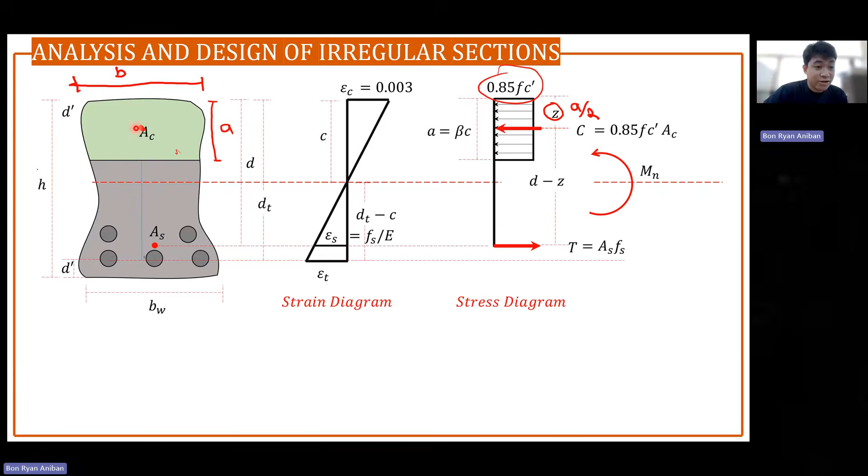Let's try to solve this problem. Problem number 1: same principle will be applied for the analysis. The triangular beam shown in the figure is subjected to a flexural moment that results in compression at the top of the beam. The concrete compressive strength is 35 megapascal and the yield strength is 420 megapascal.

Check if the section is adequate to support the maximum positive bending moment. We already have the given dimensions of the beam. We're just going to identify if this positive section works, since our reinforcement should always be on the tension side. Since our tension reinforcement is at the bottom, this is for the positive section of the bending moment.

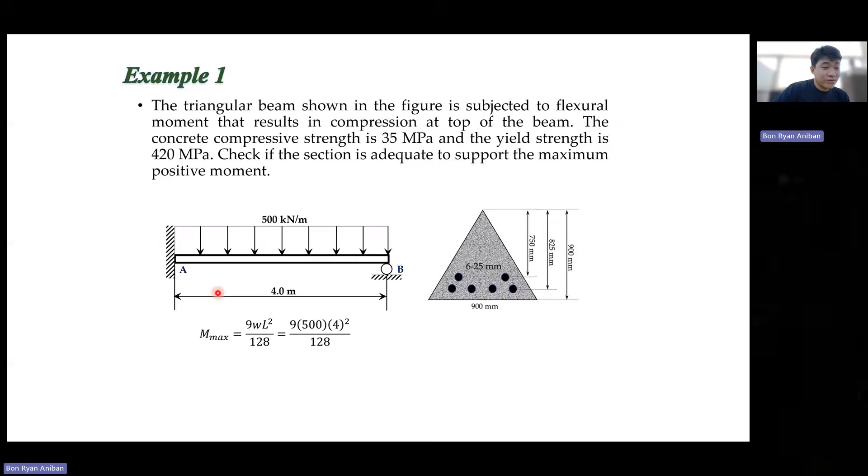So we have to identify the maximum positive moment of this propped beam, fixed and roller support. From theory of structures, you can derive the formula for the maximum positive bending moment of a propped beam with a uniform load. Here is the derived formula. The maximum bending moment is not at midspan, not exactly at the center. That is 9WL squared over 128.

That's the positive moment. The negative moment has a different value. We just need to confirm if this section can adequately resist this loading: 9WL squared over 128. So the maximum positive bending moment of this propped beam is 562.5.

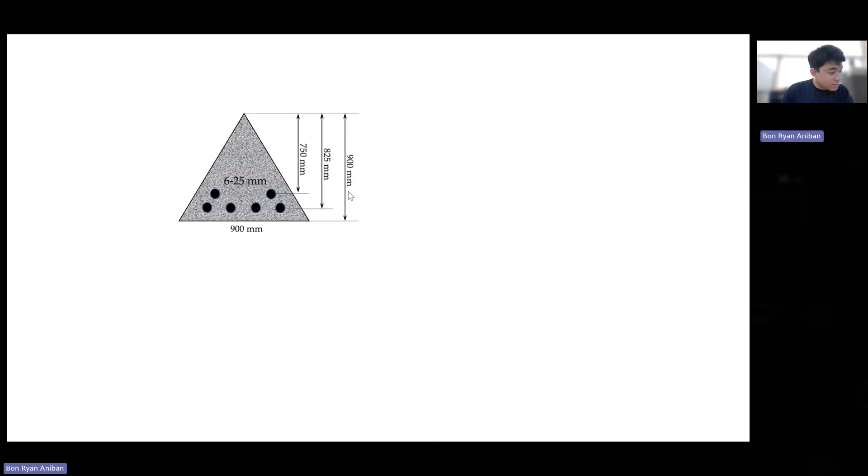Now let's analyze this section. We start the analysis with FC prime equal to 35 and 420 megapascal. Let's draw the stress strain diagram.

In this figure, the DT is already given - we have 825 for DT. The D1 was given in class for us to identify the effective depth, since the effective depth wasn't directly given to us. So we have D1 here, and we'll solve for the effective depth using Varignon's theorem.

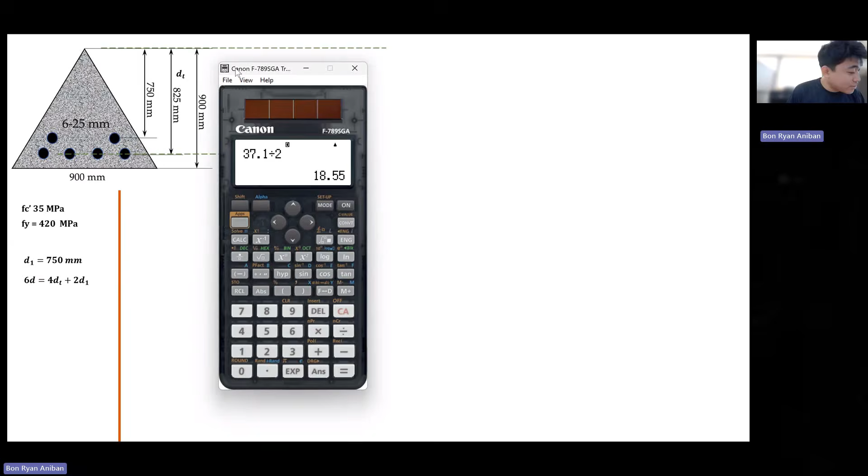Still measuring from the top distance, we apply Varignon's theorem. We have 2 bars times D1 plus 4 bars times DT, which is 825, equal to 6 times the effective depth - 6 being the total number of bars. So what will be the effective depth if we have 2 layers of reinforcement? Again, we just apply Varignon's theorem, identifying the centroid of these rebars measured to the top.

We measure from the very vertex, because we always measure the stress strain diagram from the top of the compression zone to the extreme layer of tension reinforcement. So let's solve for the effective depth: we have 2 bars at a distance of 750 plus 4 bars at a distance of 825, with the dimensions already given, and the total number of bars is 6. So the effective depth is 800 millimeters.

So let's continue drawing the stress strain diagram.

So we already have the effective depth, which is 800. And then we also need later the value of beta.

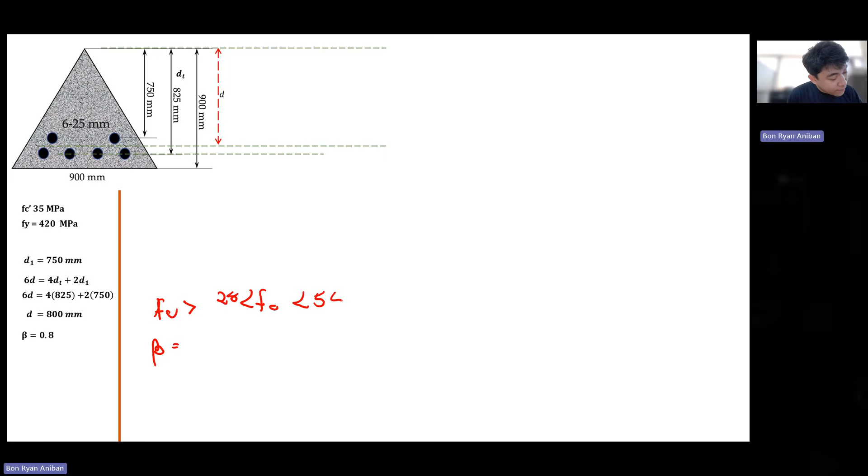If the FC prime is 35, this is our formula for beta. If FC prime is greater than 28 but less than 55, the value of beta is 0.85 minus 0.05 over 7 of FC prime minus 28. So that's what we'll get there.

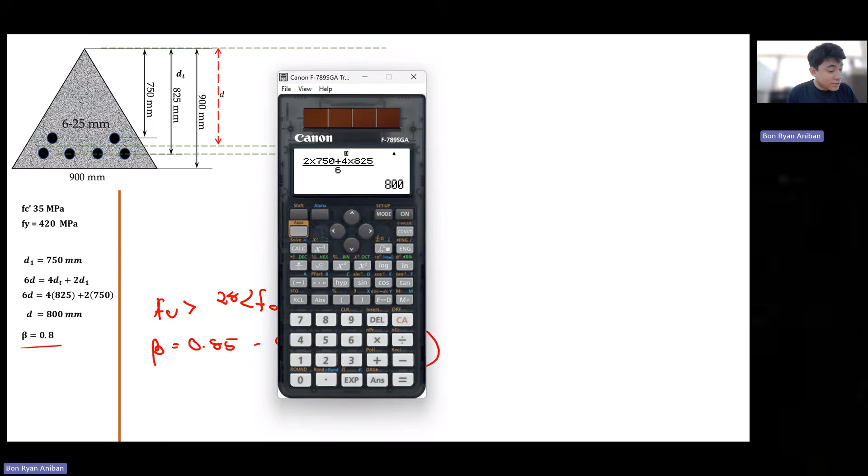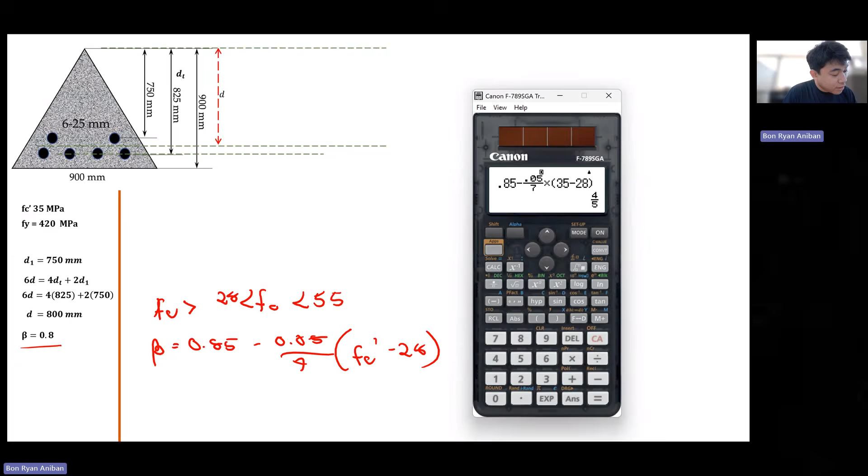Let's check the value. So we have 0.85 minus 0.05 over 7 times the FC prime of 35 minus 28. So that is correct. 0.8 will be our value for the beta.

Now, we need that later for the value of C and A. So let's continue drawing the stress strain diagram.

So this is your neutral axis where strain is equal to 0. Same pa rin siya. Then here's our strain diagram going to the end of the steel centroid and centroid of the extreme layer, and this is your extreme compression, the highest part of our compression. And the strain at that point is 0.003.

However, we do not know yet the strain at this portion. This is the strain for the centroid of reinforcement. We need this value for checking if the steel centroid or steel area is yielding or not. This we need for the reduction factor.

So this is the distance from the neutral axis to the extreme compression, the highest point. And this is dt minus C, and this is d minus C. Okay, and then we draw the stress diagram.

So for this the uniform stress is still the same. So that is 0.85 FC prime.

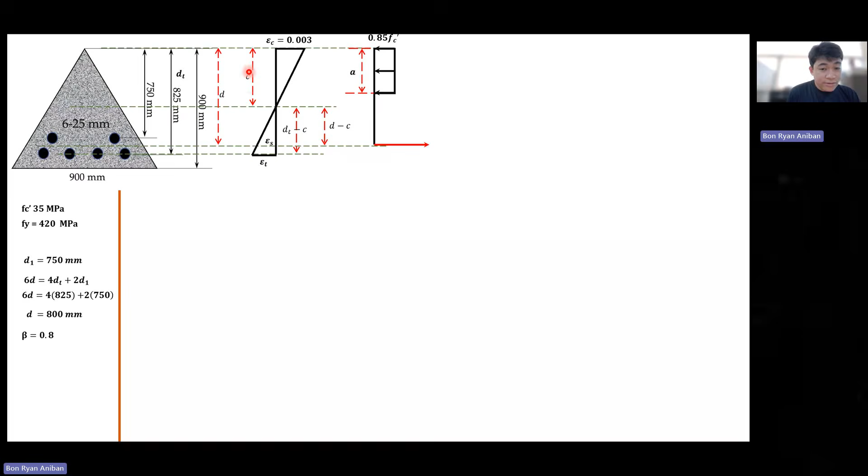Then this is the depth of the compression block, which is always smaller than the distance C. And this is your area of the compression block. As we can see here, this is no longer a rectangular area, so it becomes an irregular section when the area of the compression block is non-rectangular.

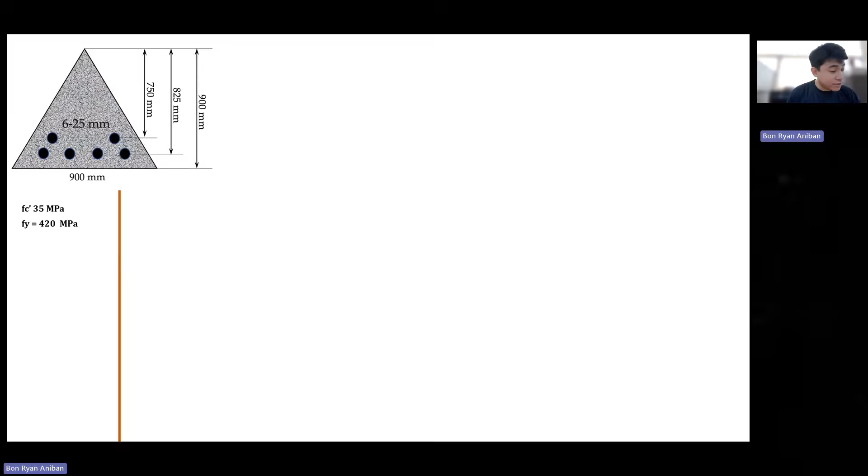So now our force doesn't act anymore at our centroid, or rather, it doesn't act anymore at the middle of A. It's somewhere here now. Here's our compression force.

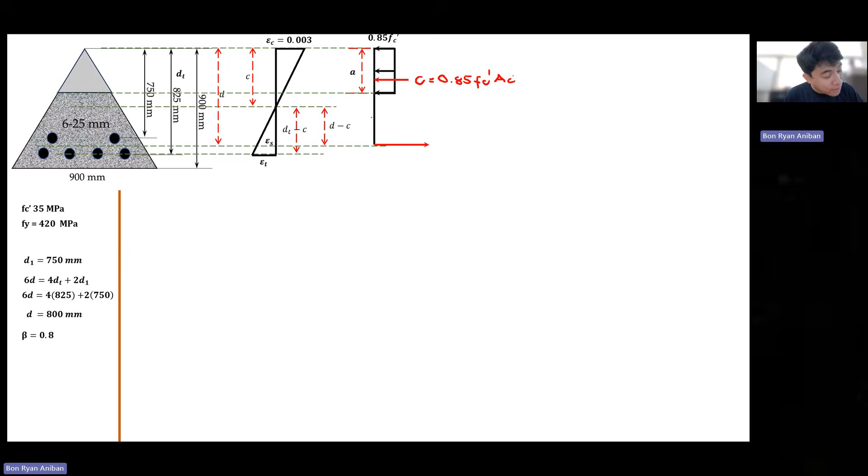Now, the compression force is 0.85 FC prime. We won't call it A times B anymore. So we'll call that area the area of the compression block. However, our tension stays the same.

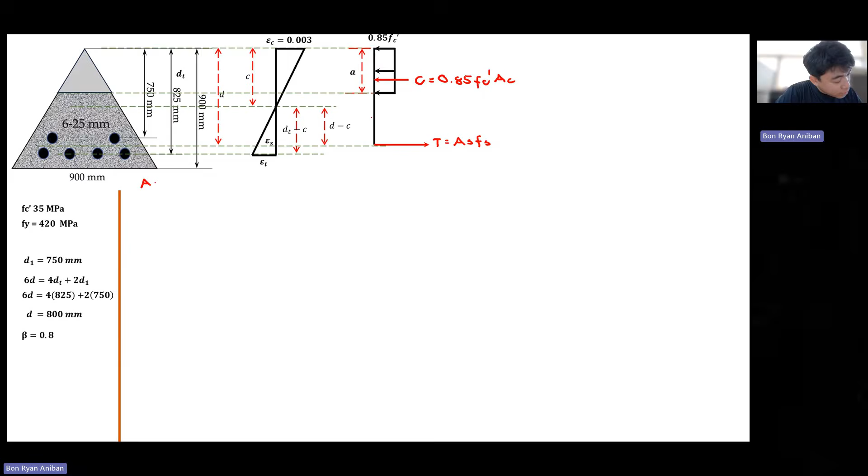AS, since this is analysis, we do not know yet if this is yielding or not. So how do we start the analysis? Same as before, assume equilibrium, assume steel yields. So we are going to assume steel yields, and then we perform equilibrium.

When we assume steel yields, we set Fs equal to the value of Fy, from C equal to T. C is 0.85 FC prime, oops, not AB anymore, the area of compression. So area of compression, AC, is equal to AS. Since we assume it will yield, ASFS becomes ASFY since we assumed it yields.

Remember, last time, if we have a rectangular section, this should be in terms of A. So how do we get the value of the area of the compression block in terms of A? Let's get the area of this triangle.

So we know the area of the triangle, the area of compression block is 1/2 base times height. Let's say this is X, and then you have the height A. This is A, so 1/2 base times height. That will be the value of the area of the compression block.

But we want A alone to be the unknown. So by ratio and proportion, we can get it. We have this triangle, X over A, proportional to this other triangle. As you can see, this triangle is proportional to that triangle. So we use base over height, proportional to base over height. So the value becomes base 900 over 900. Therefore, X is just equal to A.

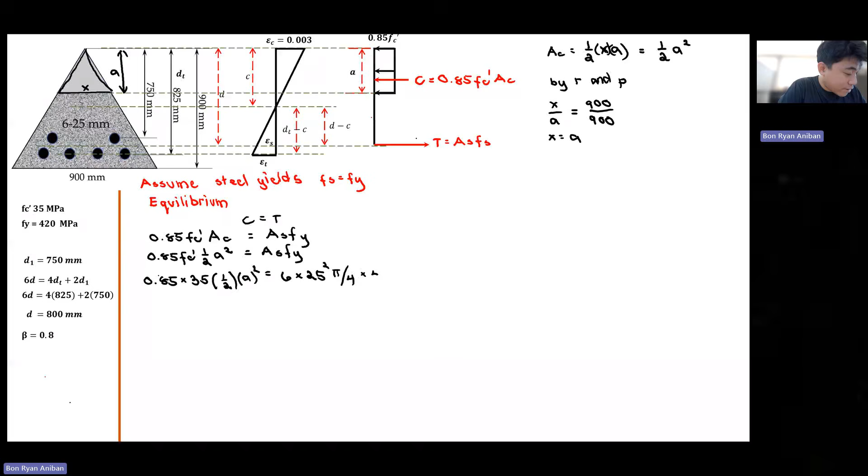So let's substitute now, let's substitute 0.85 FC prime. So we have 35 megapascal, 1/2 A squared is equal to 6 times 25 squared pi over 4 times the value of Fy, 420. So please solve, guys, what is the value of A?

288.374 millimeter. We're not sure if that answer is already correct, so we have to check what that value becomes.

By solving the strain, since we assumed steel yields, we have to solve the strain first. So let's solve C by A over beta. Beta is 0.8. So the value of C is what?

360.468 millimeters. Let's store this value at C. Then we solve the strain ES. That is the same, because as you can see, the strain diagram is still triangular, so the derivation for ES is still the same.

ES over D minus C is proportional to 0.003 over C. Nothing changed, guys. What really changed here is the area of compression block. 0.003, so we have D minus C, D not DT, all over C.

So what is your ES, guys? That is, in 6 decimals, 0.003658. So we compare this to the yielding strain, which is Fy over E. That is 420 over 200,000 megapascal, so that is 0.0021.

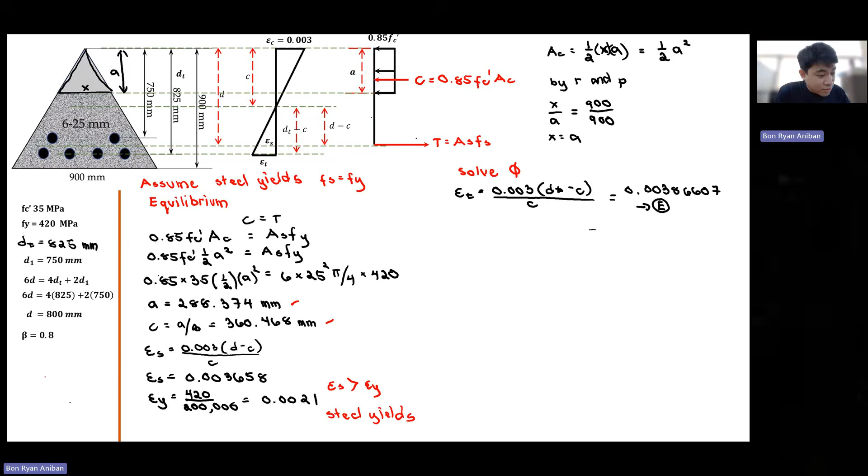So now it's stored at E. Let's check where it falls. What do you think will be the classification of this? Let's check the classification. We have here EY, then this 0.005. What do you think will be the classification of this section? Our EY is 0.002, so it exceeds that, but it's smaller than 0.005. So this is transition.

So therefore we need to interpolate, or use this formula, to solve the reduction factor. 0.65, I will just use the formula: 0.25 multiplied to ET minus EY, over 0.005 minus EY. So now the reduction factor is equal to 0.802.

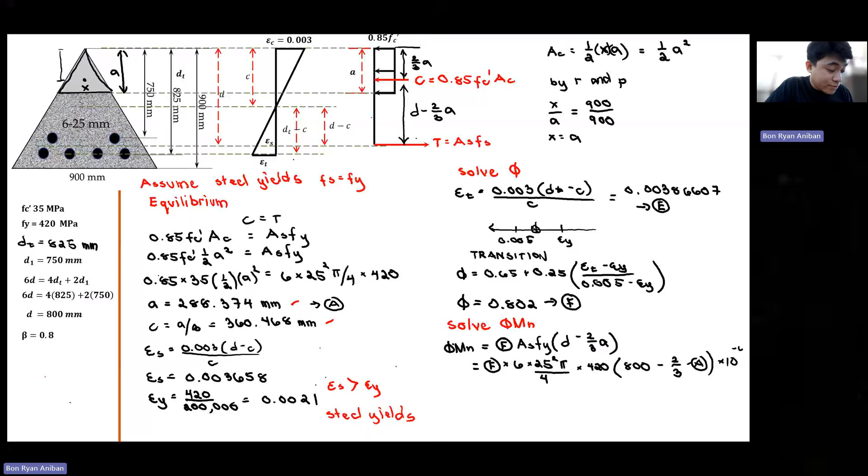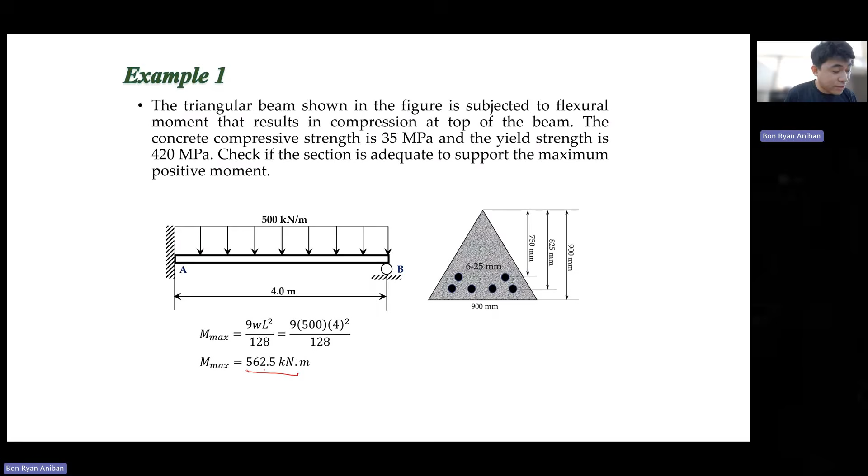I hope you stored this at A, 2/3 of A. Then don't forget to multiply by 10 raised to negative 6 so that your answer will be in kilonewton meters. We have 603. Now the question, is that safe? Our force is 562.5, the applied moment... so far, it's safe, 603.121 kilonewton meters.

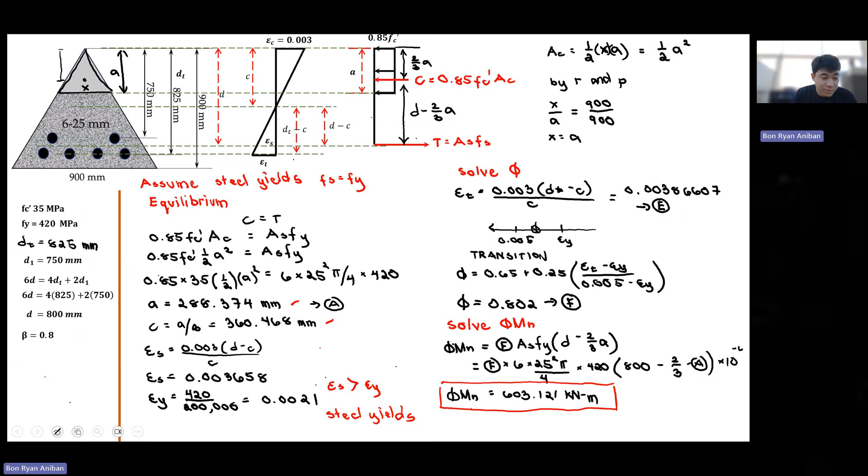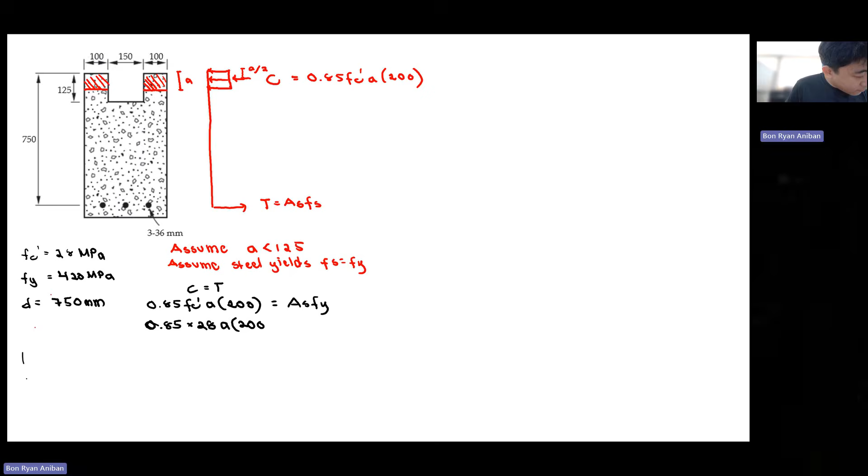0.85 FC prime times A times 200, that's your area times compression block. A times 200, then you have AS Fy. Let's substitute 0.85 FC prime 28. A is unknown, so we have 200 is equal to AS, 3 pieces, 36 squared, pi over 4, times Fy na 420 megapascal. Our answer for A,

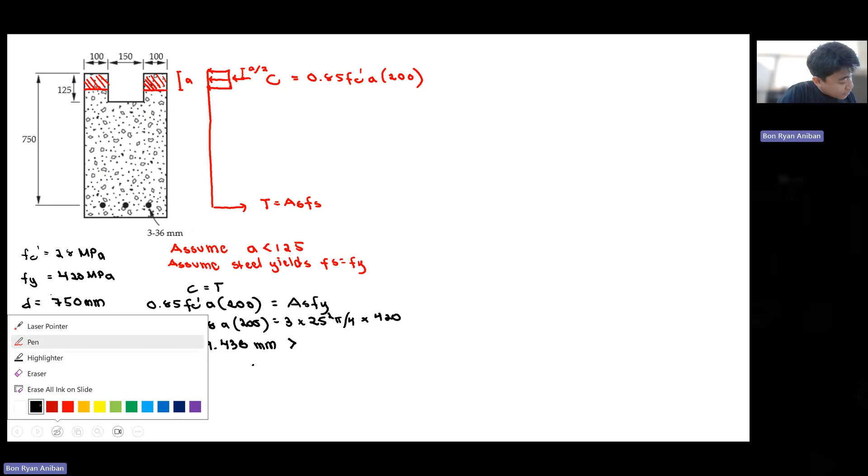269.438 millimeters. Our assumption was that A should not exceed 125. But in this case, class, that is greater than 125 millimeters. So that means our assumption that A is only up to there is wrong.

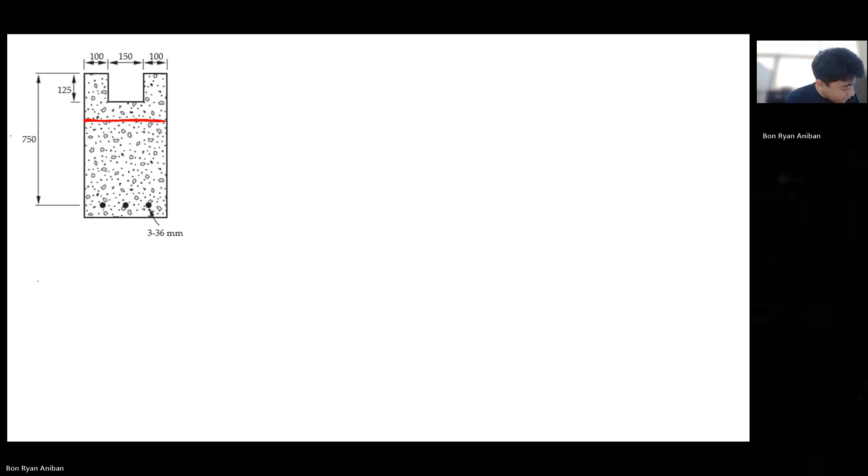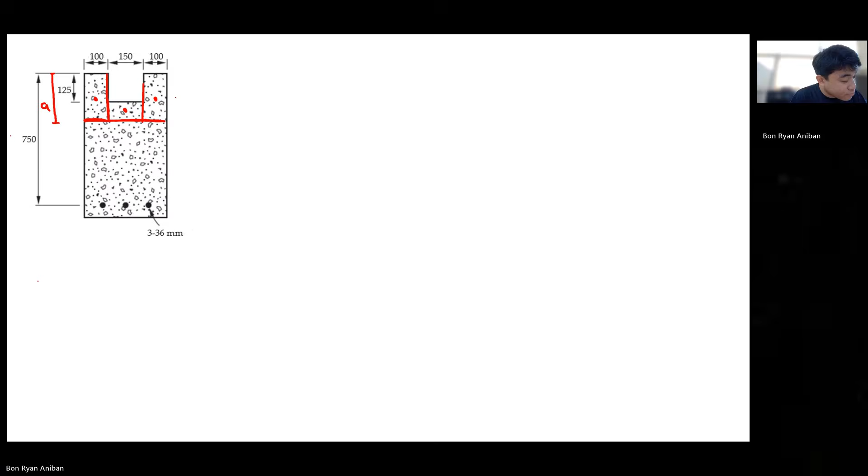So here's the centroid of this one. This one is here. Why do we divide it? So we can separate their forces. So this will be your depth of compression block. This will be your depth of compression block, A. Yes, this is your A. So if that is A, what's the height of this? That is A. The height of that is A minus 125.

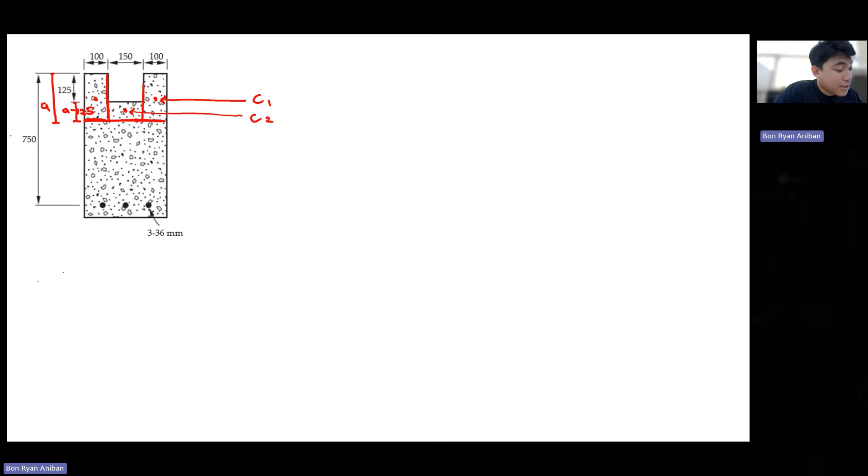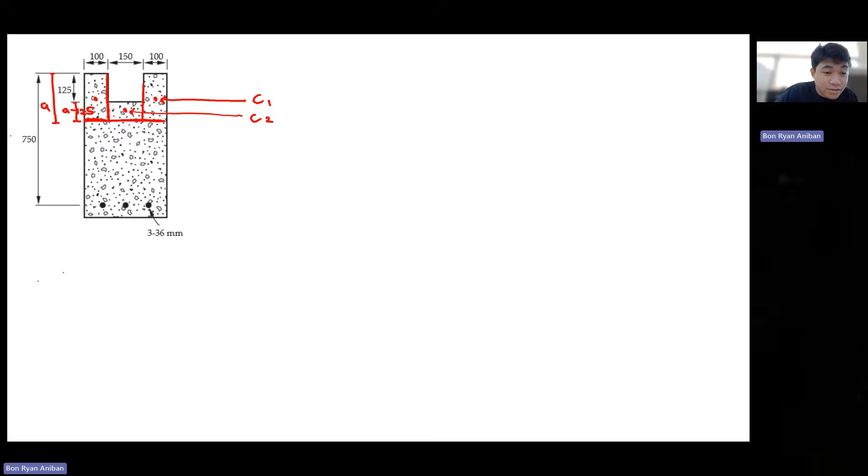Stress, uniform stress, 0.85 FC prime, area of C1. This C1, class, I combined this area with this one because they have the same centroid location. Let's combine them, this area and this one. So what will the area be? A times 200, right? So A times 200.

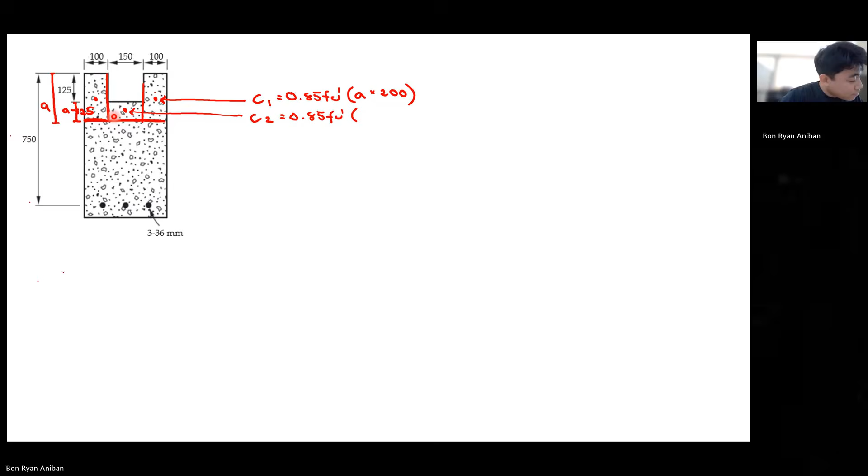Next, the other one, 0.85 FC prime. What will this area be? That is A minus 125, times its width of 150. Okay, this width is 150. So, A minus 125, 150.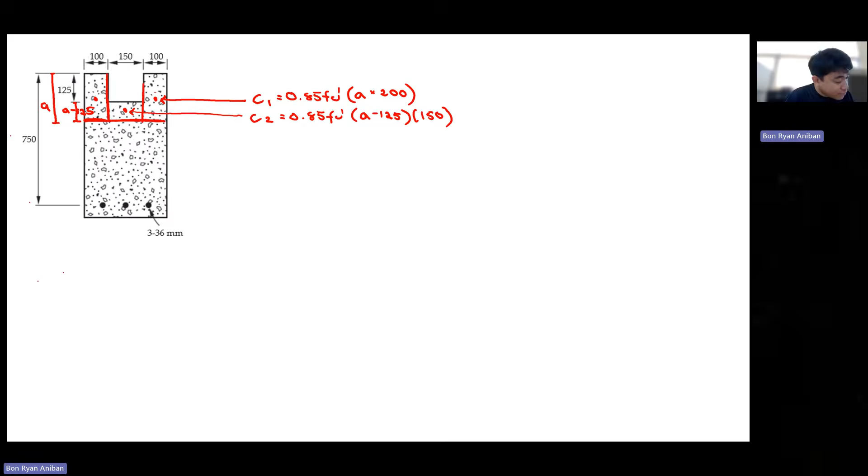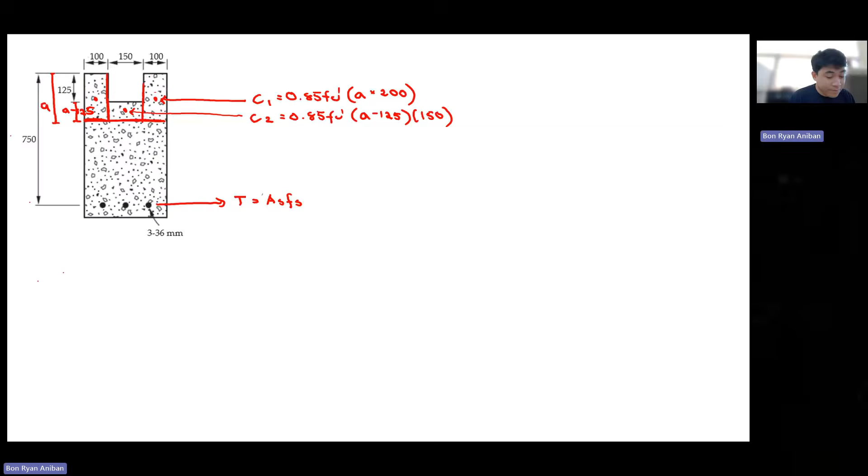So, and then the tension force, it's still located here. Okay, so that is AS, FS. We do not know if it is yielding or not. Anyway, our FC prime here, FC prime is 28 megapascal, FY is 420 megapascal.

Okay, effective depth, 750 millimeters. Beta, 0.85. Okay, so how do we start the analysis? Still the same, class, but you no longer assume here, because automatically A will be greater than that. So these are the first assumptions: assume steel yields, C is equal to T.

Your C is now two parts, C1 and C2. You just add them. So, 0.85 FC prime, A times 200, plus 0.85 FC prime, times A minus 125 times 150, is equal to AS FS, which is AS FY. Let's substitute.

0.85 FC prime 28. A is unknown. 200 plus 0.85 FC prime 28 times A minus 125 times 150 equals AS, 3 pieces of 36 squared, pi over 4, FY is 420 megapascal. So with that,

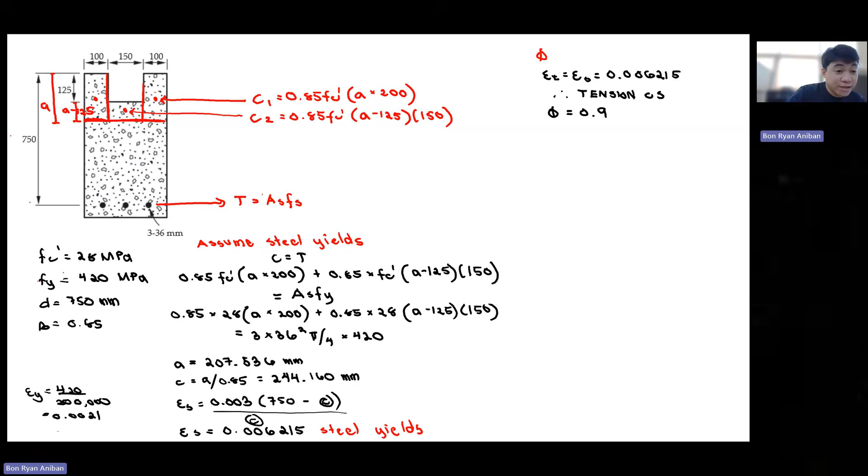We separate those two forces, class, kasi mahihirapan tayong kunin yung moment ng single force compression dahil mahirap yung centroid nun. So parang kino-component natin sila. Sabi naman sa Varignon's theorem, the moment of a force is just equal to the moment of its components. Kung i-momento natin yung dalawang force na ito, equal din yan sa moment ng resultant ng dalawang force na yan.

Okay, so let's get the moment now, guys. Kunin na natin yung capacity. Kung ito ay i-moment natin yung tension papunta sa centroid nito, magkukuha ka pa ng centroid. Though alam mo na yung value ng A, you can get the centroid niyan, ng letter U. Pero mas matagal pa yun.

So pag ganito, class, na nahahati mo yung forces mo sa dalawa, wag yung tension ang i-moment mo. Yung compression force, i-moment mo sila dalawa, yung dalawang component na yun. Okay, so i-moment natin sila isa-isa.

Aalamin natin yung mga distance na ito. Ito muna, ano distance niyan? Okay, ito madali yan, kasi yung C1 nasa gitna ng A. Ano magiging distance niyan, class? This will be D minus A over 2. Siya kasi nasa A over 2 lang to eh.

Ito, nasaan ba to? What will be the distance of that force? Take note, this is D, the total depth, 750. So how do you get this distance? Nasa gitna siya ng A minus 125, no? So how do you get this distance?

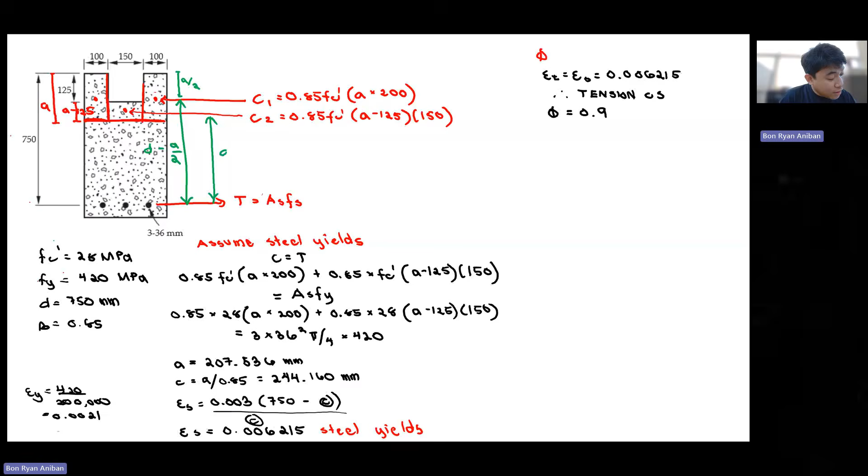That will be D minus itong 125, buwasan mo pa ng A minus 125 over 2. Ayan, binawasan lang natin ng 125. Yung D, binawasan mo ng 125, binawasan mo ng A minus 125 over 2.

Okay, so may dalawa tayong force, C1 and C2. I-moment natin sila isa-isa. Phi MN is equal to reduction factor, Phi, MN. Ganito natin siya, yung C1 i-multiply natin with D minus A over 2. And then C2, multiply natin ng D minus 125 minus A minus 125 over 2, times 10 raised to negative 6. Pag-add mo itong dalawa, kasi dalawa yung i-moment mo eh. So medyo mahaba siya, so i-type lang natin.

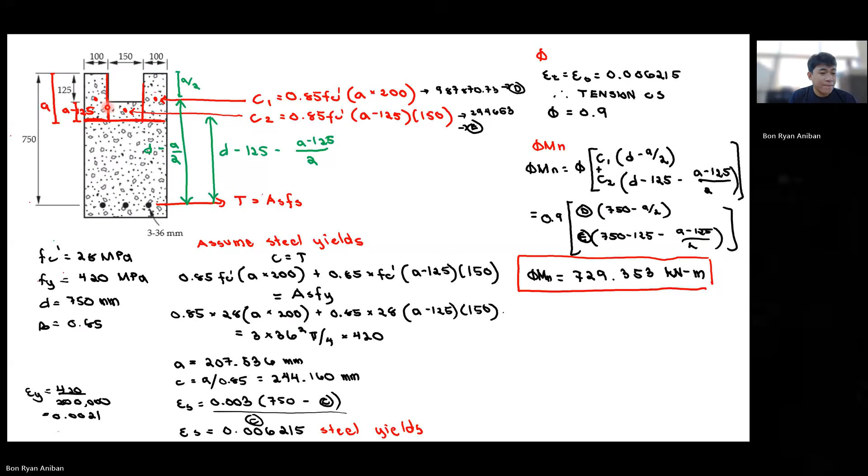729.353 kilonewton meters, okay, so yun. So that's the capacity of the section. That's how we solve the capacity of an irregular section, especially kung nagkakaroon ng dalawang portion, or hindi siya triangle, hindi siya rectangle, irregular section.

So hahati-hatian mo siya into common figures so that you can easily identify its centroid. I hope you get yung point ng paghati nito ng mga forces natin. Parang hiniwalay lang naman natin yung area. Actually, pwede mo naman kunin yung total force niyan, stress times the total area. Yun yung total force, stress times this total area. Hiniwalay natin for the lever arm, pagkuha ng moment capacity. Okay, so this is the moment capacity now.

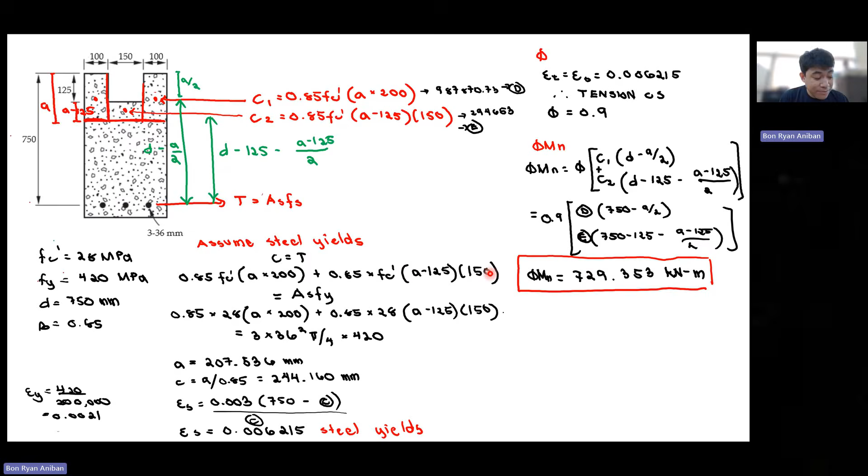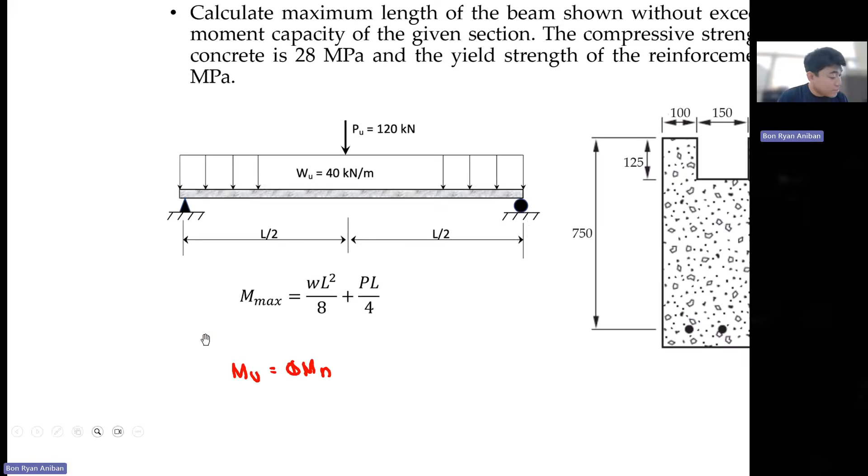Ang pinaka-question kasi dito, guys, is yung length ng beam. So we have to identify the length of the beam. I-equate lang natin yung moment dito, kasi what we're going to do is MU is just equal to Phi MN. Ibig sabihin, yung Mmax natin will be equal to, na-solve natin kanina, 729.353 kilonewton meters.

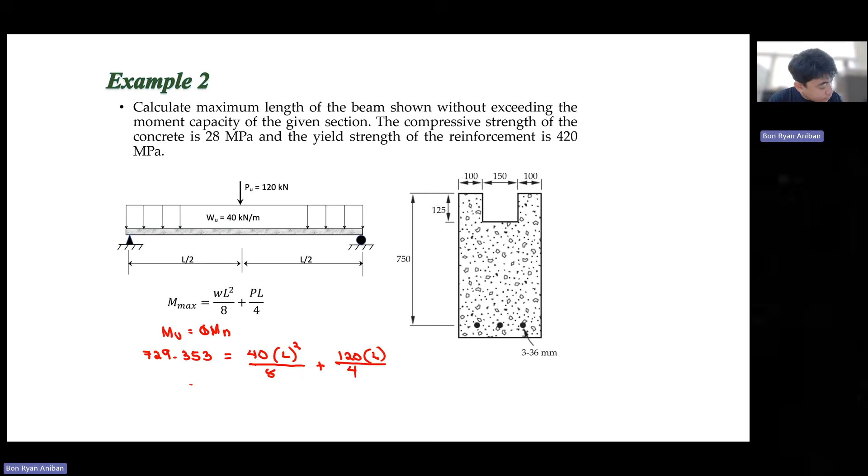Again, this is just superposition, no? 729.353 is equal to W, 40, L, we do not know the L, squared over 8, plus P, L over 4. So the length now is equal to 9.445 meters.

Hindi ka pwedeng mag-exceed dyan, guys, sa value na yan, kasi pag nag-exceed ka sa value na yan, hindi na magiging safe yung ating beam. Ginawa mo siyang 9.5 meters, bawal na yun, kasi lalaki yung MU. Ito yung MU mo eh, pag ginawa mo siyang 9.5, lalaki siya.

Yung MU versus the capacity, di ba dapat almost equal lang sila? O dapat mas malaki lagi yung capacity doon sa ating factored moment. Okay, pwede kang mag-9 meters dito, safe yun. Pag 9 meters lang, mas maliit yung MU natin versus doon sa capacity.